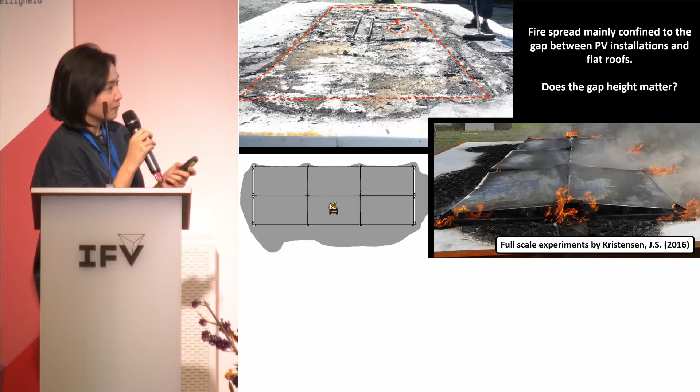So we have a typical roof fire, but the physical presence of the PV module, according to past research, has shown that it leads to an increased radiative heat flux and therefore heats up the roofing material. However, there's a lack of understanding about how this effect is affected by the gap formed between the two surfaces, and how this also affects the rate of flame spread.

So this is quite a complex system, and what we try to do is simplify the problem to focus mainly on the effects of the gap. To do that, there's a variety of materials used for PV modules as well as roofing material, and it's important that we decouple the effects of these material properties in order to have a fundamental understanding of fire spread within this gap.

So a combustible surface is used as a surrogate material for the roof. And we've chosen PMMA not because it's used on roofs. It's not used on roofs, and please do not use it on roofs because it's combustible. PMMA is selected because it is a well-defined material, which is commonly used in fire spread experiments, and it has a reproducible fire spread behavior.

At the same time, previous studies have also shown that PV modules themselves have a limited combustibility, which is limited to the backsheet material. So we've used a non-combustible surface as a surrogate for the PV modules. Stainless steel is used just so that it does not introduce undefined fire load into the system. We've also done experiments replacing the stainless steel with actual PV panels to see whether the results are reproducible.

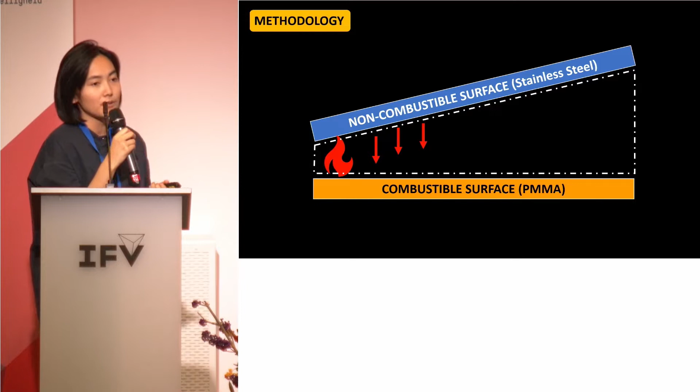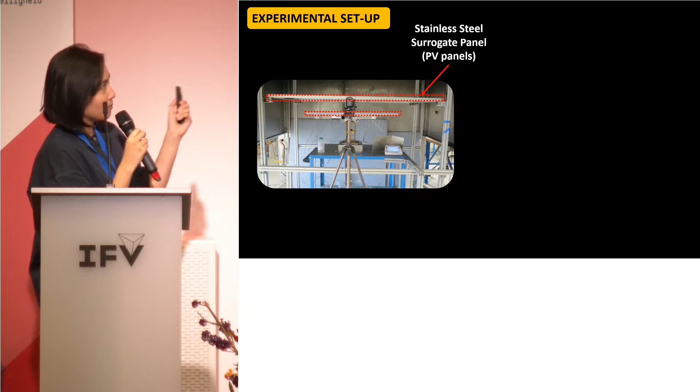As you can see, there are various angles of inclination of the PV panels on roofs. So in order to simplify the problem, we only look at a panel which is horizontal. With that concept, the following experimental setup was designed. We have the stainless steel panel, which we'll also replace with PV panels, and the PMMA sample. We have a lab jack to vary the gap distance between 10 to 25 centimeters.

A video camera is used to monitor the progress of the flame, as well as thermocouples and a heat flux gauge embedded within the PMMA sample, because we know that these are contributing factors to fire spread. Homogeneous linear ignition is achieved by igniting a strip of ceramic paper which has been laced with methanol.

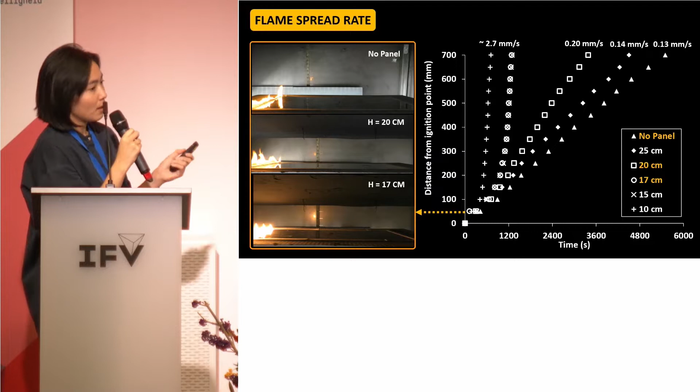So these are the results we get, where we recorded the progress of the flame front every 50 millimeters. To help you visualize that, we will study mainly three situations: without the panel, with the panel at 20 centimeters, and the panel at 17 centimeters. These three pictures show how the fire looks for the first 50 millimeters, and you can see that there's not much difference between the three, but you notice a difference when we allow the flame to progress along the sample.

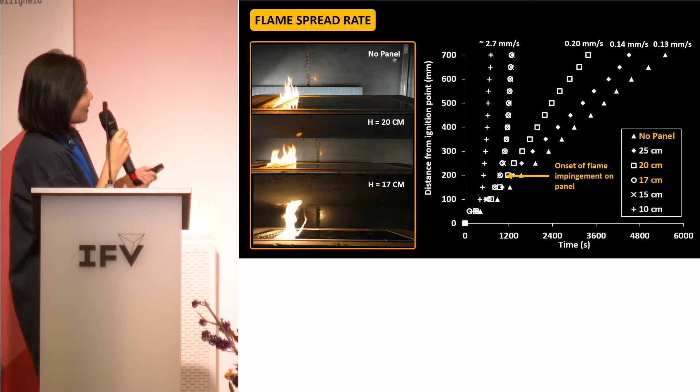For situations with the panel, the flame spread rate is actually higher and the fire size is larger. But for the 17 centimeter scenario, the fire continues to grow until it impinges on the panel, and the flame accelerates to a resultant flame spread rate which is around 20 times more than a free burning situation.

However, if you see the situation at a gap height of 20 centimeters, the flame spread rate is slightly faster than the free burning scenario, but it's relatively constant and stable. So it shows that the panels at these heights have limited effect on the flame spread rate. This result shows that there's a critical gap height below which a fire may seem small at the start, but if given sufficient time to grow, it will lead to a rapid transition to a really fast flame spread rate, and could result in an uncontrollable fire and increase the damage caused.

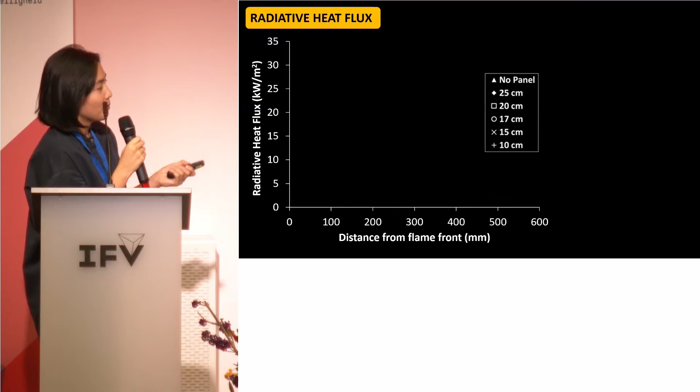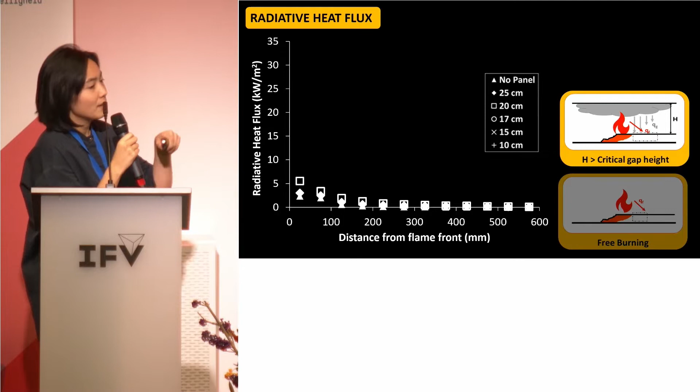In order to explain this phenomenon, we'll also look at the radiative heat flux recorded as the flame progresses. So in a free burning scenario, flame spread rate is mainly driven by the radiation from the flames. At gap heights larger than the critical gap height, the presence of the panel actually forms a layer of hot gas which in turn heats up the panel. And both the hot gas and the panel impose a larger heat flux back to the surface. However, the combined effect is limited in terms of intensity as well as extent from the flame front.

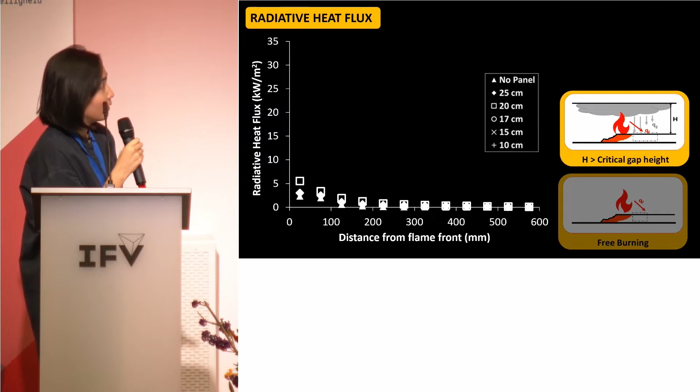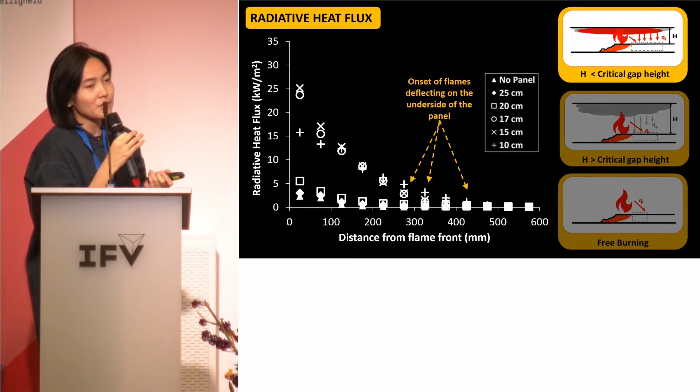However, when the flames deflect, it increases the heat flux directed back to the surface significantly, because now the flames are the ones which are radiating heat back to the surface. And these results show that the amount of radiative heat flux caused by the deflected flame will actually increase the flame spread rate drastically.

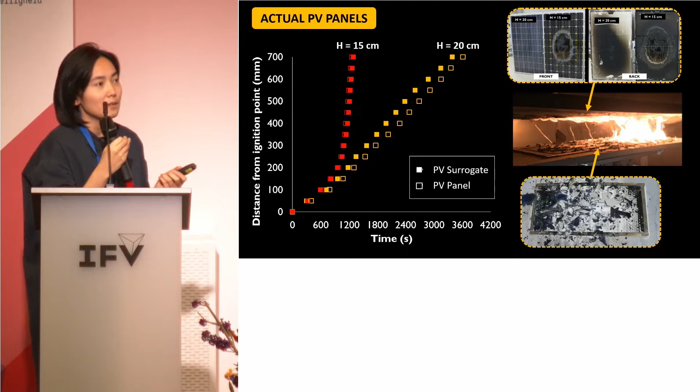We also did a comparison study using PV panels instead of the surrogate material, and we see that there's not much difference, which is good. However, using the PV panels, especially when the flame deflects under the panel, will cause the panels to disintegrate. And at the same time, when you want to do this for further studies, you need to keep replacing the PV panels. So in this case, using a surrogate will be sufficient to give us an indication of the critical gap height.

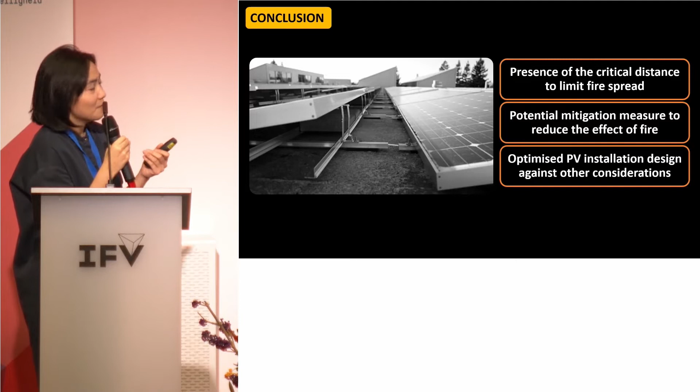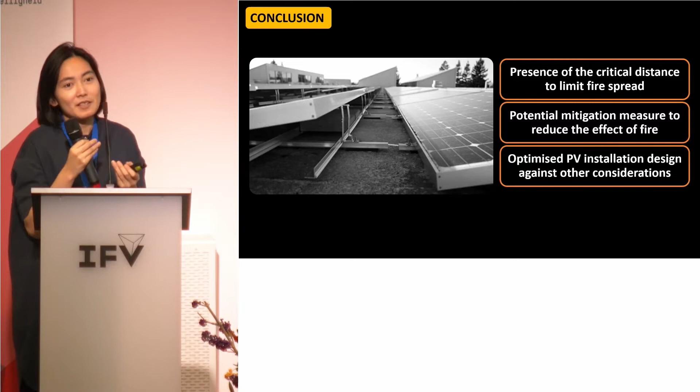So in conclusion, our results show that just a minimal difference in the gap heights will cause a large difference in the flame spread behavior. So there's a presence of the critical gap distance, which could be used as a mitigation measure to limit the spread of fire. And currently, the gap heights are determined in building design by architectural interest, seismic considerations, or wind load considerations. And this might act to reduce the gap heights, but this contradicts what is needed from a fire safety point of view. So with this study, we hope to be able to get a critical gap height for PV installations that could be a cost optimization measure in the design of PV panels on roofs.

However, it would be nice to stand here and tell you what is the gap height which we should be designing our PV panels to, but I can't because this is just a preliminary study. There's potential for this setup to continue to be further analyzed and further refined in order to get more useful data.

However, all hope is not lost, because I'm quite happy my thesis will not be sitting in a library collecting dust, because it's part of a larger research project led by two people I've yet to introduce: my supervisor, Professor Grunde Jomaas from the University of Edinburgh, and his PhD student, Jens Steemann Kristensen, who is here today and giving a workshop later, so if you have any further questions, please ask him. Yeah.

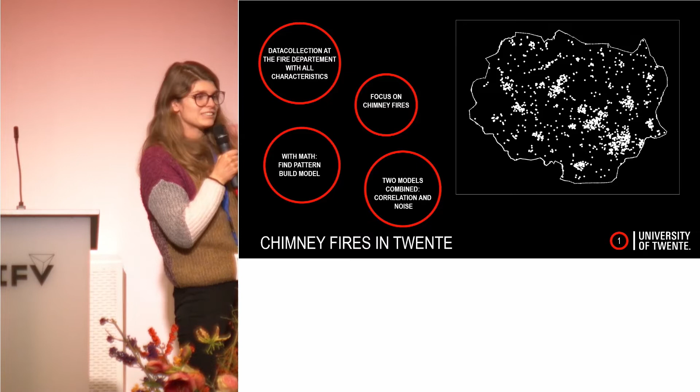This is because chimney fires are the largest type of fire in Twente. We see them on the right. From 2005 until 2015, chimney fires had happened in all these places in Twente. We see the cities quite well, but also outside the cities, chimney fires have happened.

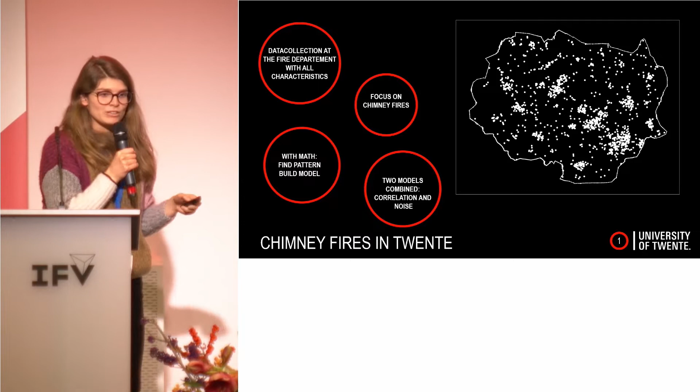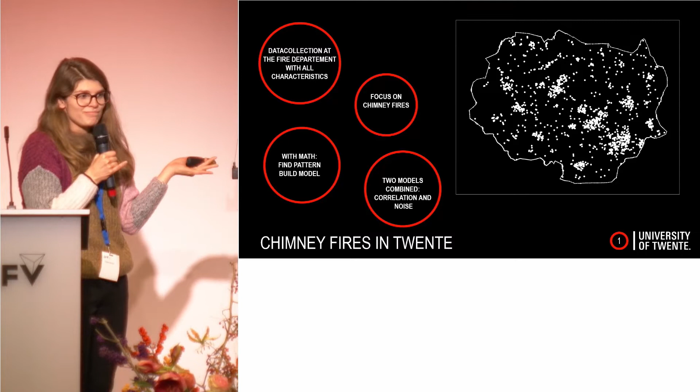And to build a predictive model, we want to find a pattern between the data of chimney fires and data that we have available. For my thesis, I combined two models, a correlation model and a noise model. This correlation model finds this pattern between spatial and temporal variables and chimney fires, and this noise model can add some randomness to this model, so that the total model is the combination of those.

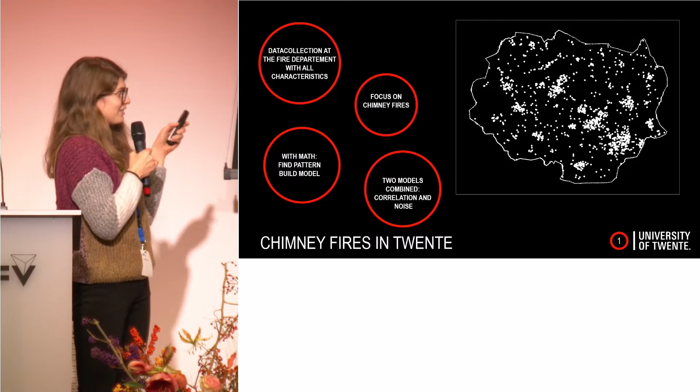So first, the correlation analysis. We are using an inhomogeneous Poisson process for this part. Just a name. Yes, and we want to check which spatial and which temporal variables have an influence on chimney fires. For spatial variables, you can think of what Twente looks like: the number of buildings, number of older buildings, number of residents, etc. And for temporal variables, you can think of weather conditions, or maybe on a holiday we expect more chimney fires, things like this.

To do this comparison, for the spatial variables, we divided Twente into boxes of 500 by 500 meters, and we compared the data for each 500 by 500 meter box with the number of chimney fires that we have in our data. For temporal variables, we did kind of the same thing, but then we divided the data into days.

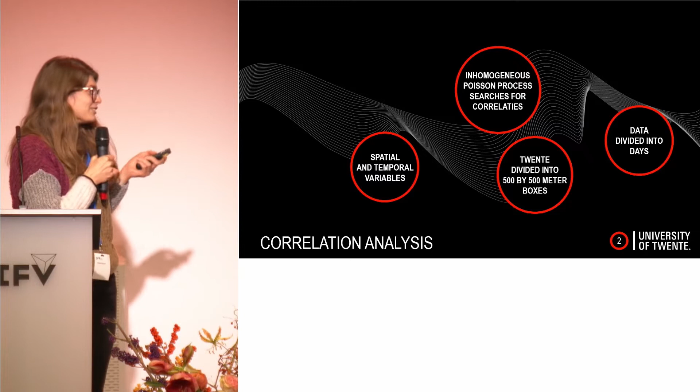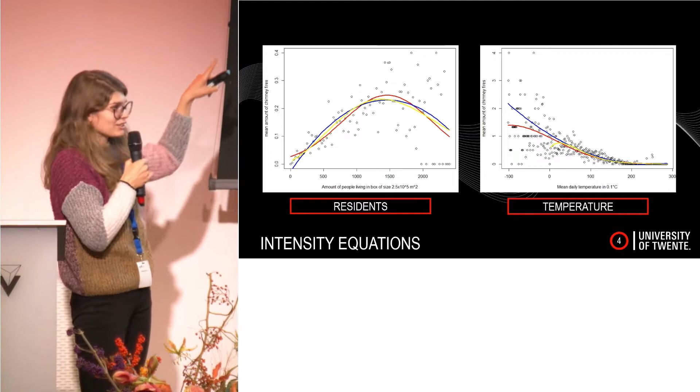I tried 3 different types of intensity functions to fit to the data. And here we have the results of that. So on the left, we have the number of residents per box, from low to higher, and the mean amount of chimney fires. At first we see an increase in the chance of the occurrence of a chimney fire, just because there are more people, more houses, more chimneys. After a certain point, it decreases again, and we can explain it by saying when a large amount of people is living there, we see a lot of apartments which don't have chimneys. Quite logical. So the best fitting function here we included in our model.

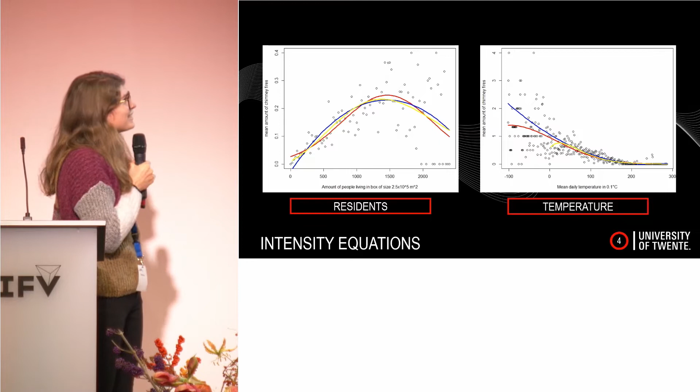On the right picture you see simply: the lower the temperature, the higher the chance of a chimney fire. These intensity functions can already form a model, and we made predictions with that, but then we found that there was still something missing. And we found that this was because of the weather tipping point. Especially in October, we predicted much fewer events than actually happened.

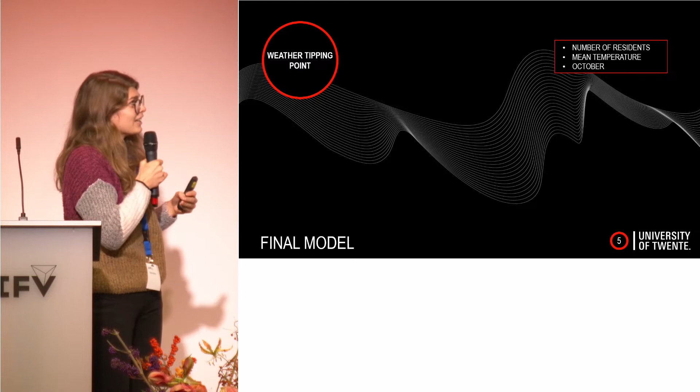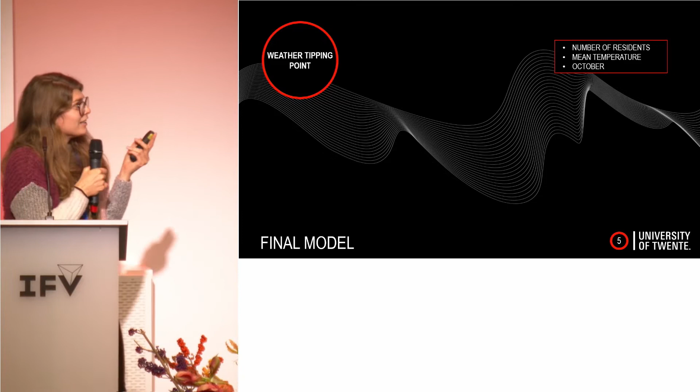We thought that this was because in October, the temperature drops below a certain point. People start making fires in their houses. The chimneys are not cleaned, they're maybe dirty, just not used enough. And therefore, the chance of the occurrence of a chimney fire is simply higher. We wanted to include this as well. So our inhomogeneous Poisson process, the correlation model, then looks like this. We have 3 intensity functions for the number of residents, the temperature, and October.

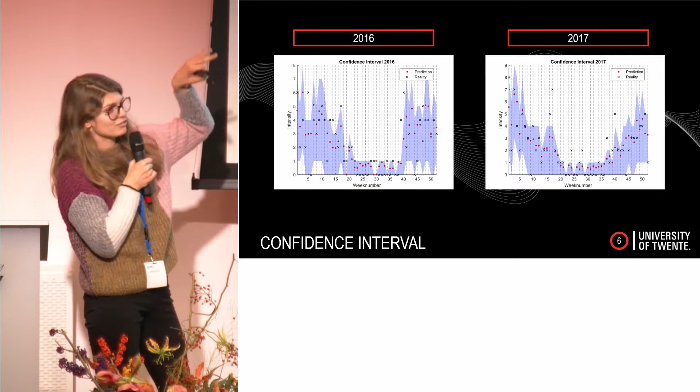So as I said, I built a model on data from 2005 and 2015, and here 2016 and 2017 are listed to show the results, to validate. On the left, we predicted per week. So we have here the week numbers. The red dots are the predictions, the crosses are reality, and the blue area is the confidence interval, which follows from a mathematical model. We see that actually 85% we are inside the confidence interval, which is quite good.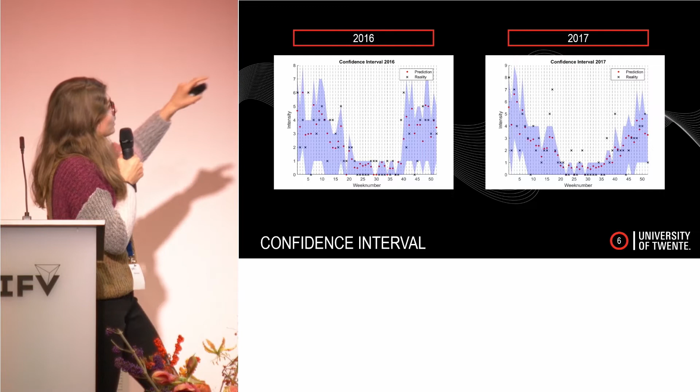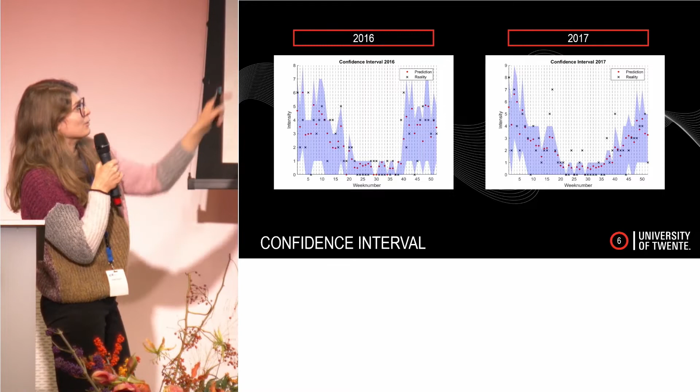We see some outliers in the summer, which is still difficult to predict. There's one or there's none. In October, it's still quite difficult, and at the end of the winter as well. But still, these results were quite satisfying, and that's why the fire department asked me to build a dashboard for it, to make the model also usable for the fire department.

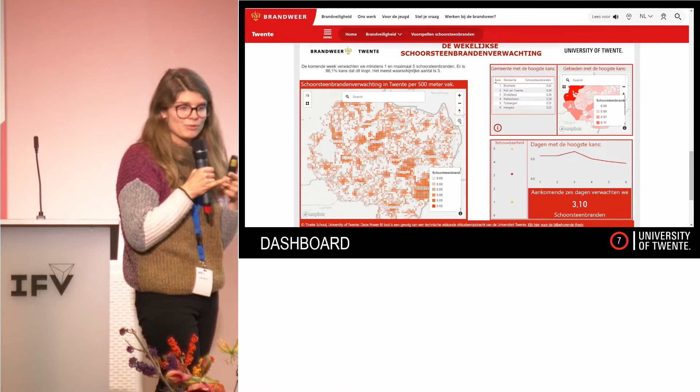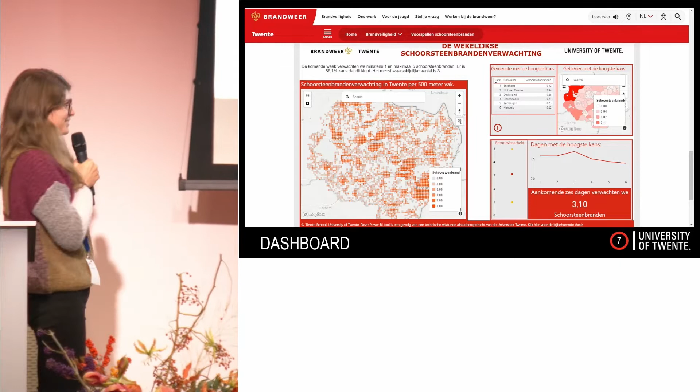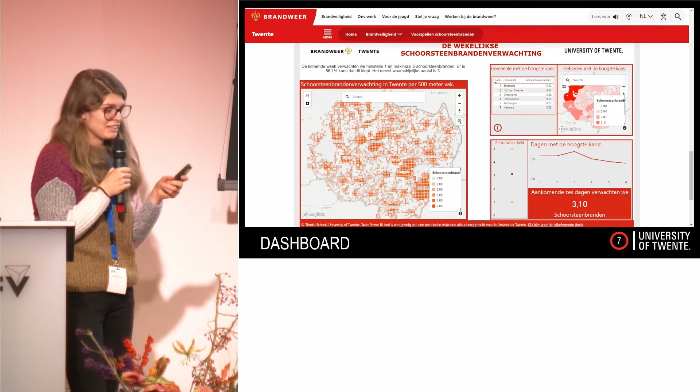Yeah, because chimney fires, it's a type of fire, and it's actually occurring quite a lot in Twente, but there are still hundreds of other types. So in the future, they would like to extend this and use the same models for other types and combine them, and hopefully in the future we then have a predictive model which the firemen can use.

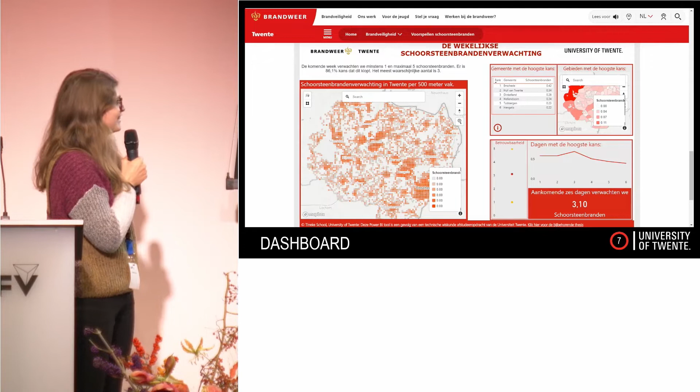Well, thank you, Tineke. You were well within the time, so there is some time to relax now, yes, because there was a lot of commotion in the conference room. So, last one, Suhaila, may I invite you to do your presentation? Okay, thank you.

So, good afternoon, everyone. I hope you still have enough energy for 10 more minutes before lunch to listen. I'm Suhaila, fresh graduate from Fire Safety Engineering from Ghent University. I'm working for Fire Engineered Solutions Ghent company, and I will present the results for CFD modeling of medium large-scale fire plumes. The content of the presentation: introduction, the goals and the study steps, the test cases that we studied, and the final conclusion.

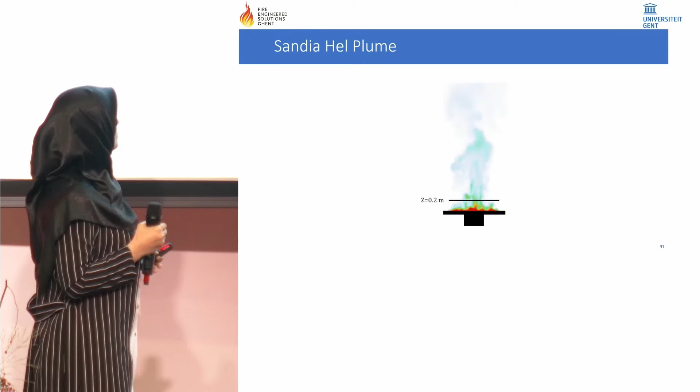experimental test case, but it's simply, as you can see in the picture, a 1 meter diameter inlet through which helium is injected into the compartment, and it generates buoyancy-generated turbulence, which nicely resembles fire plume behaviors. So here I'm showing the computational domain that I used in my simulation, and I did mesh sensitivity analysis. We ran the case for 35 seconds, with variable time step sizes controlled by a maximum Courant number of 0.9. I will show you now some results, this is the inlet, 20 centimeters above the inlet.

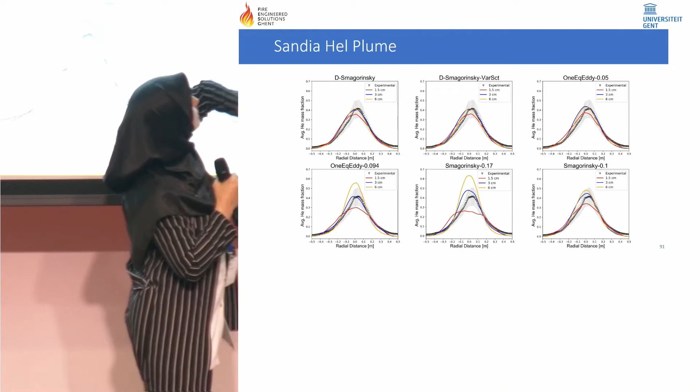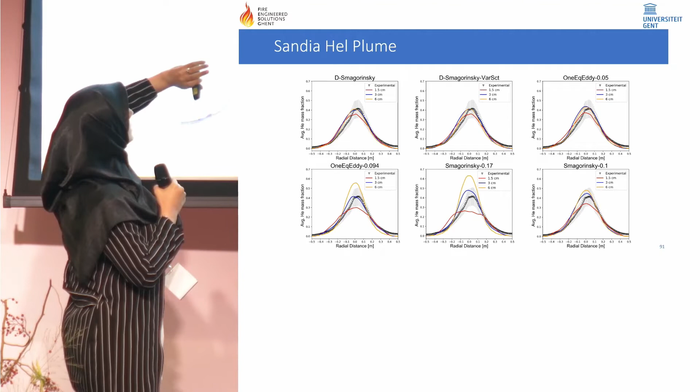And we also wanted to see, is it possible to get good results if we modify the model constant for these static, already available models? Yes, it is possible. We changed the model constant, you can see there. But it required us to do extra simulations. It is not predictive fire modeling. It means we have to do extra simulations, and sometimes you won't get the results after only one extra simulation. So these dynamic models, which give you nice results and are not that mesh sensitive, are there. You can use them without needing to adjust any constant and so on.

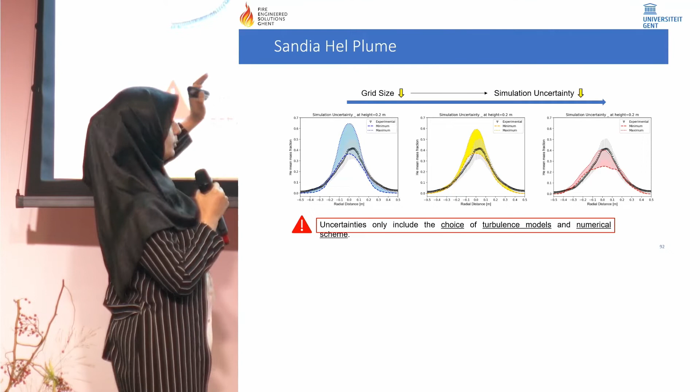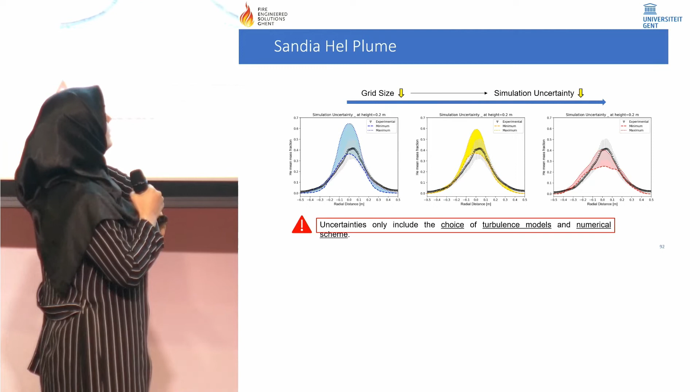So I didn't show you much of the simulation results that we obtained. We also checked the numerical schemes and their effects. What I would like to show in this slide is the simulation uncertainty depending only on the choice of your turbulence model and numerical scheme. It can be this much if you're on a coarse mesh, and the uncertainty reduces as you go to finer mesh sizes, simply because you're resolving more flow structures, and in fact you're reducing the impact of your model.

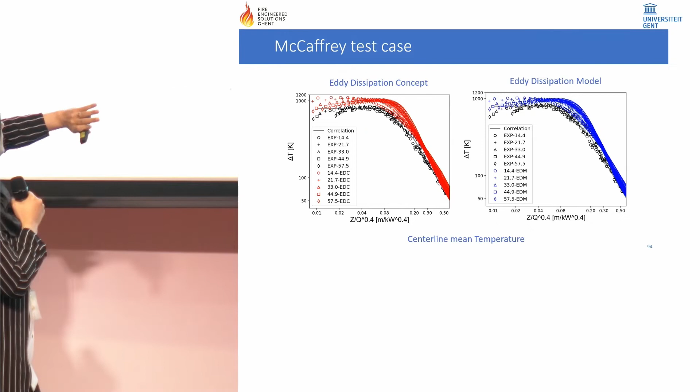So next step, combustion modeling. We took McCaffrey test case results. It's a natural gas 30 centimeter by 30 centimeter burner at different fire loads from 14 to 57 kilowatts. So here I'm showing the computational domain. We also adjusted the inlet mass flow rate to have the same fire loads. We tried two different models, the eddy dissipation model available in the software, and the eddy dissipation concept that we applied in the model. You can see how these combustion models and also the dynamic turbulence models we applied nicely reproduce the experimental results. All the simulation results for different heat release rates collapse onto each other as in the experiments.

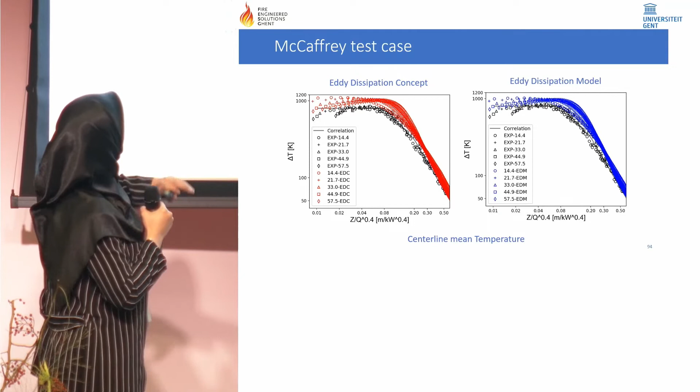We didn't see too much difference between these two models. It's simply because we didn't introduce the possibility of dissociative and intermediate reactions, which is possible in the eddy dissipation concept. That could have made larger differences between these two models. But overall, with all the results that I'm not showing here, we found that we get closer results to experiments if we use the eddy dissipation concept model, because it incorporates turbulence and combustion modeling. This is what we would like to see. So this is the best model for combustion modeling we figured out in this case.

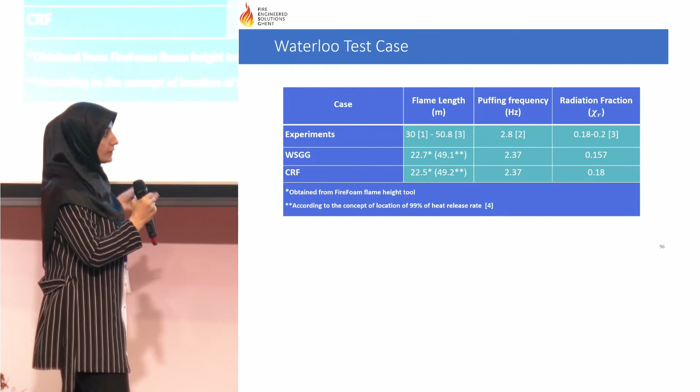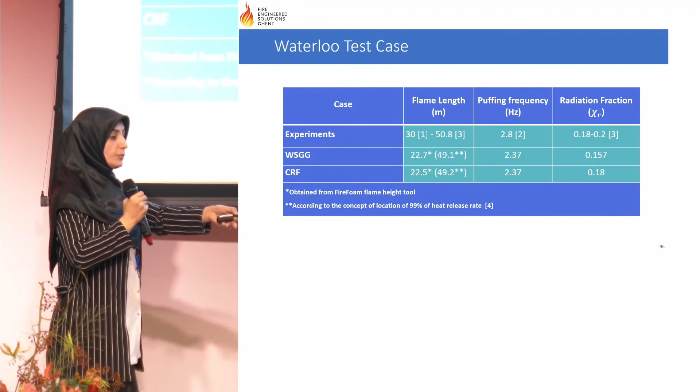But with the weighted sum of gray gas model, you don't need that. The model itself will calculate the radiation fraction dynamically for you. And this is one step more toward predictive fire modeling. So here the weighted sum of gray gas model is the best. So the best models for predictive fire modeling are the dynamic Smagorinsky with variable Schmidt number, eddy dissipation concept, and weighted sum of gray gas model.

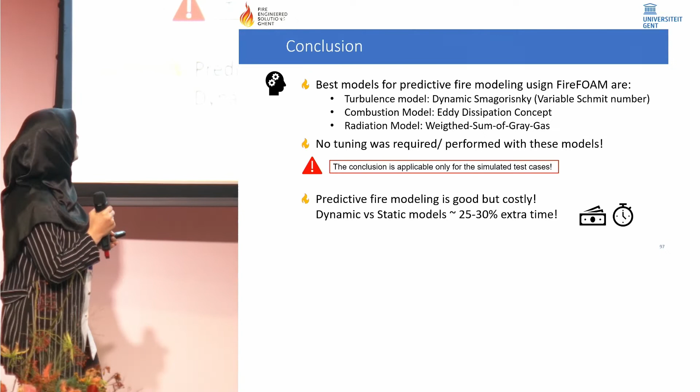No tuning was required, but keep in mind, this conclusion only applies to my simulated test cases. So for your own specific test case, please don't rely on me, do your job. And predictive fire modeling is good, but it's costly. So it depends on you. Do you want to spend extra time on it? Thanks.

Thank you very much, Suhaila. Is there anyone that wants to volunteer to be in the jury next year? Because you can imagine what Ruud, Lieve and I were going through reading these beautiful theses of yours and also the very interesting subjects that you proposed to us.

And well, every jury says it, but it is really difficult to choose which is the best one because the subjects are a little bit different. And also, I must say that we think all these theses were of a high academic and scientific level. So we could not choose based on the scientific level or the subject or the methodology, because everything was almost perfect. So in that sense, your theses did not discriminate.

So what we thought was, of course, the purpose of our thesis award is that it should be practical, it should be innovative, and it should also be striking for the people that read it. And some of your theses were very difficult for outsiders, really meant for insiders. So that is what we also took into account, and then we were able to make a choice. First of all, the jury report, before I announce who won.